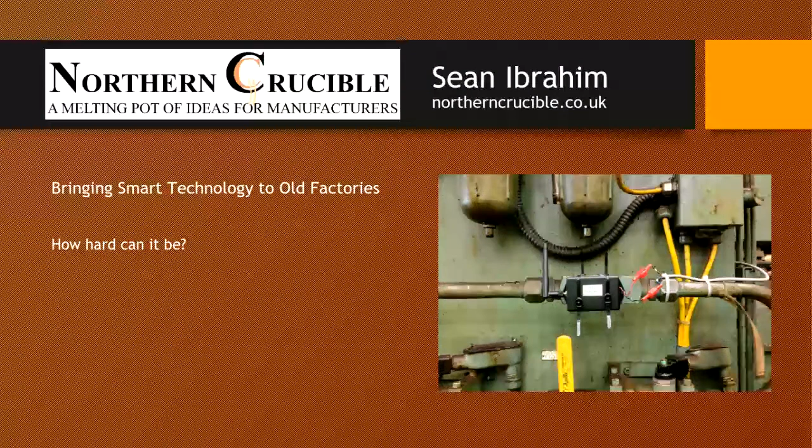I'm Sean Ibrahim from Northern Crucible. I'll do the introduction in a minute, but the topic for me is bringing smart technology to old factories. Most of the people I know are in legacy industry, and I'll talk about that in a minute.

Northern Crucible is based in Sheffield. We look after the local region. It's a voluntary forum for manufacturers in our region, with a membership of about 200 manufacturing companies, mostly small to medium enterprises. It's all voluntary, there's no charges for anything, all the information we give is free, and all our speakers do what they do for free. So it's a great place for sharing information.

I'll give you a little background about myself. I've spent 30 years in the industry - manufacturing industry, in MRO supply and smart tooling. I've been involved in lean and more recently apprenticeships, and I've got a background in pneumatics as well.

I put this in because it's quite interesting - 25 years of voluntary work in sport at high levels. Why would I put that in? Well, probably the biggest thing I've seen in my 25 years is the giant leaps forward British sport has made. I've watched elite athletes pick up gold medals, and when I was a youngster we were lucky if we picked up 4. It occurred to me - why doesn't our industry adopt the same attitude? This is why I'm talking to you and why I get excited about it.

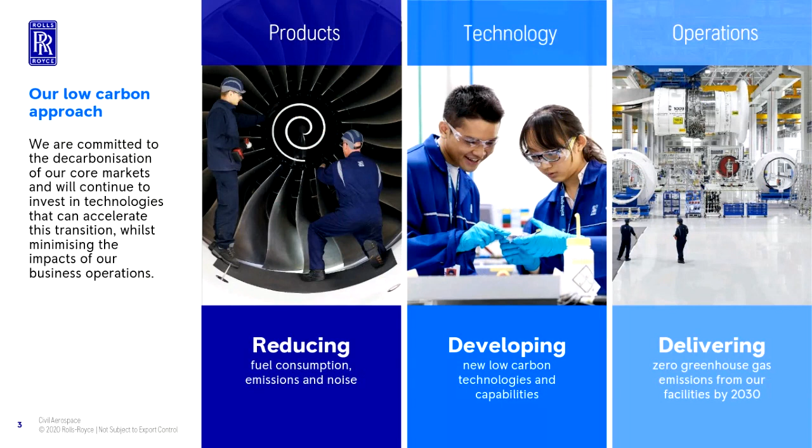Next slide please. Thank you. So our low carbon approach is through developing products that are indeed smart. The topic of today's conversation is IoT, and we use a lot of sensors throughout our engines and assets to be able to detect anything above 7,000 parameters.

That enables us - Sean was touching upon it earlier - to measure the most minute of things to the most detailed of levels. For example, we can sample data all the way to a 1 Hertz data rate, meaning every second we can capture data for all the parameters we monitor, and we're able to trend alerts and highlight any issues back to the airlines and ground operators.

that use our assets. Our approach towards technology is focused on ensuring we continue to champion our low carbon focus, so we're always looking at how to make our assets lighter, how to make the noise lower, how to make everything operate cleaner. For operations where we manufacture our assets and conduct our business, we're continuously investing in lowering our greenhouse gas emissions, and our intent is to go zero by 2030.

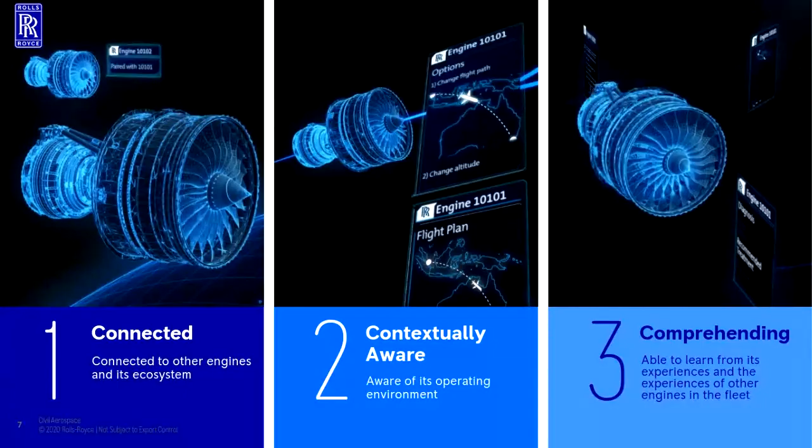One way we do that is through the provision of equipment health management. Equipment health management is all about avoiding surprises, keeping the fleet flying reliably so that our passengers are happy.

For almost 3 decades, we've been using the power of data to give our customers greater control of their assets and insight into their operations. We have close to 30 years of experience in data integration and analytics. In the aerospace sector today, 1,300 customers relying on our data service monitor 13,000 engines, covering 6,000 to 8,000 commercial flights per day, and we analyze billions of data points on board per flight.

On the Trent service alone, we monitor 14 million miles flown every day, from approximately 4,500 engines. That's over 5 million parameters per day, with an average process time of 3 minutes—that's what we aim for. That's roughly 384 observations that we manage per day, with a 3.9 minute average operations-on-arrival rate.

To put that in context: the engines are flying and transmitting data through the aircraft, depending on what the airline spends and can afford. Either it goes live into a satellite link and comes into our operations, or as the airplane lands, the data is transmitted to their ground station and comes back to us. We put a lot of automation in place to continuously analyze all this information and play it back to our operators.

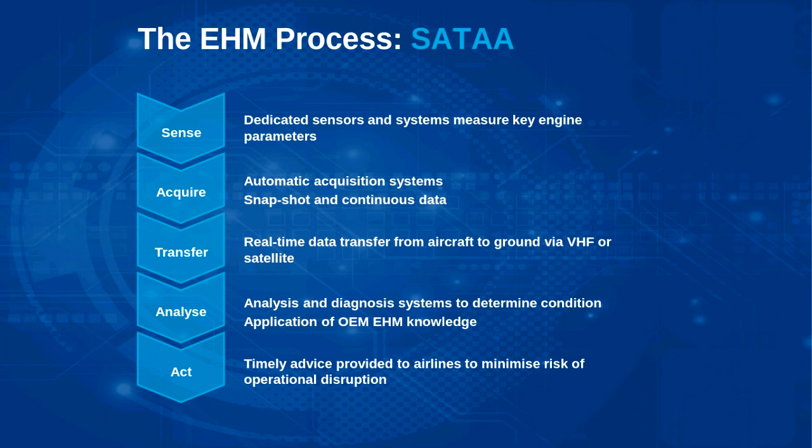So I touched upon earlier that the engines capture the data, but there's also the wider aspect: the aircraft capture data as well. Depending on what the airline is prepared to spend, these data points get either transferred live as they're flying towards a satellite, and then we get them, or when they land we put them onto the ground station and that gets transmitted. This is for all the airlines in the world who fly a Rolls-Royce engine.

Once that data comes into our systems, we apply data analysis and trend monitoring on top of it. Where there's a high red alert type issue that needs immediate attention, the airline, the ground crew, the pilot, our field service representatives are all made aware automatically through our systems. Actions are taken to ensure minimal aircraft on ground time so that your flights can take place as soon as possible, as safely as possible.

Through this data we also use it to help us understand when we need to remove our engines for maintenance. For airlines, time is extremely precious, and for you, your safety is extremely precious, both for the airlines and for us, everyone in the aviation industry. Being able to plan intervals for when we need to take these assets off and bring them to our maintenance repair overhaul shop bays across the world, we need to be able to use data to do that.

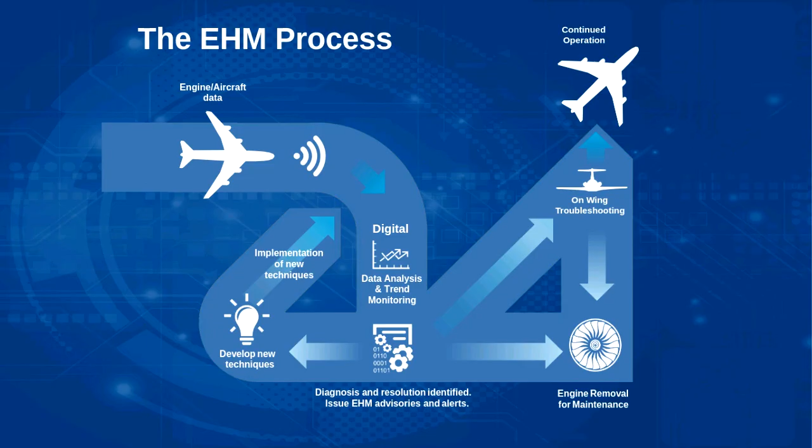This is where our intelligent care comes into play, where we have services and capabilities in place that enable the airlines to understand when they need to plan overhauls. They help us understand how much work we need to do on the engines. They help the supply chain coming into us understand how many parts we need, where we need them, and when we need them.

This is all enabled through IoT, being able to capture all of this information at all of these places in the maintenance, repair and overhaul shops, on the aircraft, in the engine, on the operations, making sure we use smart capabilities such as the emergence of augmented reality, as an example. Making sure the field service representatives, when they're doing their work, are given the right information at the right time, in the right way, so they can carry out all the activities they need to ensure the flight takes place as soon as possible.

This is where it becomes very important for us to always create virtual representations of the physical assets that are out there. We call this the digital twin. Through creating these digital twins, these models, these virtual mimicries of the real life asset that we have, we compare the actual performance of the assets.

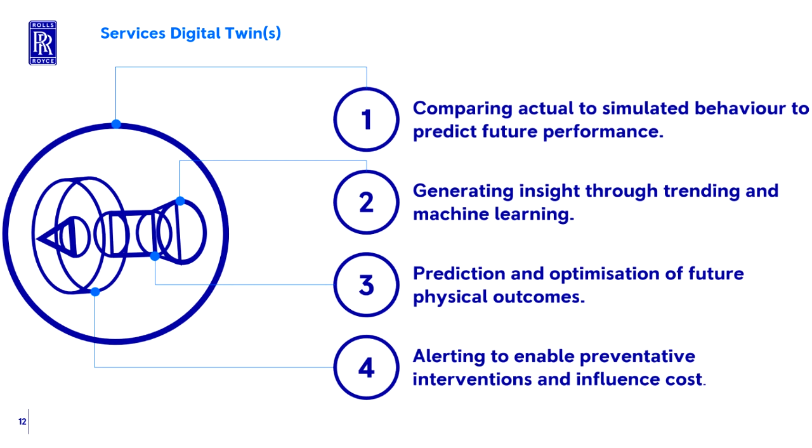The future for us is where we're looking to develop cyber physical services with a digital mindset first, a digital approach first, always thinking about how we can make our products and services for everyone, for our customers, for yourself, smarter. This is always enabled through capabilities such as AI, machine learning, IoT, and cybersecurity, so that we don't get hacked all over the place. And indeed, the people who make this possible are the young talents such as those on this call today.

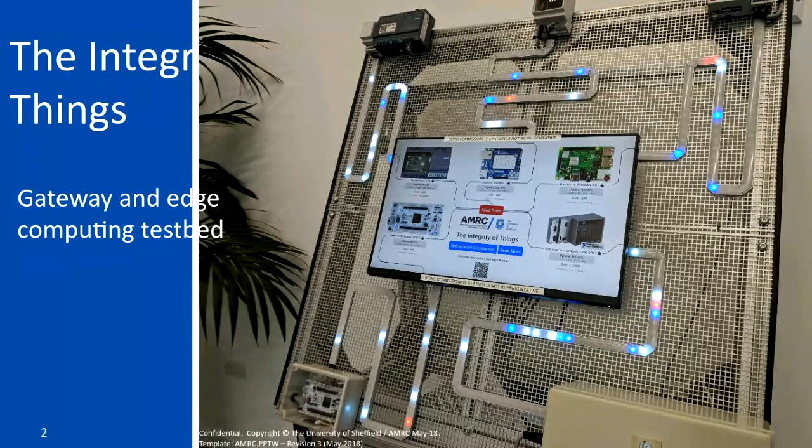Now most of what I'm going to talk about from here involves a lot of projects that use things like these devices in examples, but hopefully it will give you a fairly broad range of what can be classed as IoT.

Whereas previously, in a normal situation, they would have to look at drawings and then measure up where they need to put things in. This system does that for them automatically, and there's not an awful lot of smart stuff in there until you get to thinking about some advantages here.

So the first thing is that it's a smart projector. So if we need to move it from one side of the room to the other, it will recognize that it's moved and recalibrate itself to put the instructions back on the wall in the right place.

The next piece is that it can be a connected system as well. So let's say you're driving to work and you've got that in the back of the van, and you've got one set of instructions or drawings on the way there, and during the journey, the architect or building services engineer makes some amendments to that drawing for whatever reason - I know they shouldn't, but let's say they have. As long as that can be connected to the internet at some point during that journey, or when you're getting it set up, you can automatically get the latest version of those drawings put there straight away, and that basically turns that whole system into an IoT device. Just a bit of a different application.

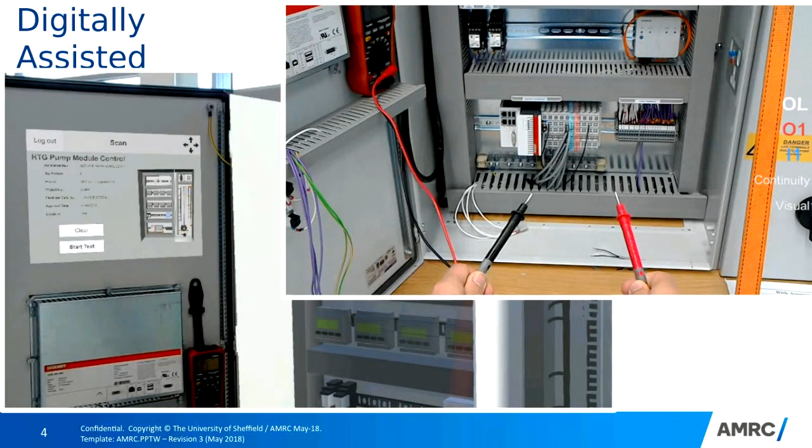And I talk about that one for a couple of reasons. One of them is that it looks massively expensive, it looks very fancy, but after you take away the cost of the shelves themselves, that system's only about $3,000 in hardware. So it's not ridiculously expensive, it just looks like it is.

But this system is then connected up to the MES system that you might be running, so the manufacturing execution system. And there's an awful lot of other IoT devices that are connected here as well.

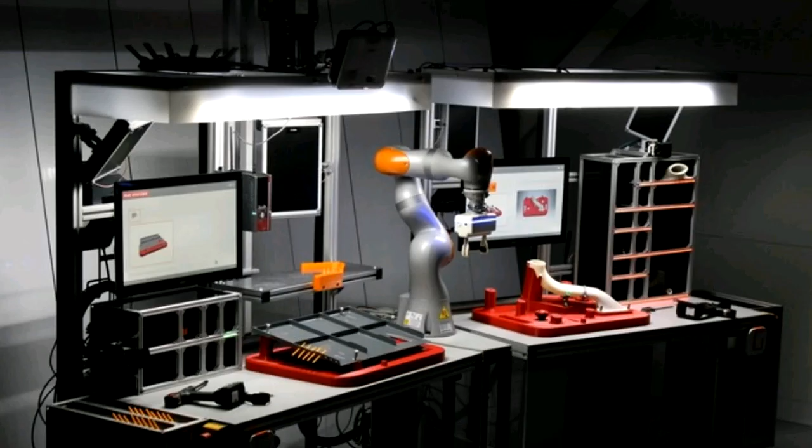This is just showing how you can connect up an awful lot of devices in an IoT sort of situation. The advancement of that, or where you'd see the development or use case, is in something like this, which is a smart workbench we worked on with one of our aerospace and defence customers.

Here you can see those kitting shelves again, so the pick by light systems in a smaller version are there, but you've also got projectors projecting down, giving instructions to the operator on the next part of an assembly, which are connected up to the MES system.

You have camera systems that are verifying that things have been done and that the next process has occurred. And yet again, in aerospace or a sector like that, that's really important to have that verification.

We've got smart tools on the bench there as well, which goes back a little bit to what Sean spoke about earlier on the likes of a nut tightening operation. Can you confirm via the data that you've got the right torque on a certain nut or bolt? Those smart tools allow us to do that because they're connected.

They can transfer that information back up to the MES or to a central database where we can confirm if we've done the operation correctly or not. We can automatically set the torque on the devices as well. But that's where you start seeing that bigger connection of an awful lot of bits and pieces.

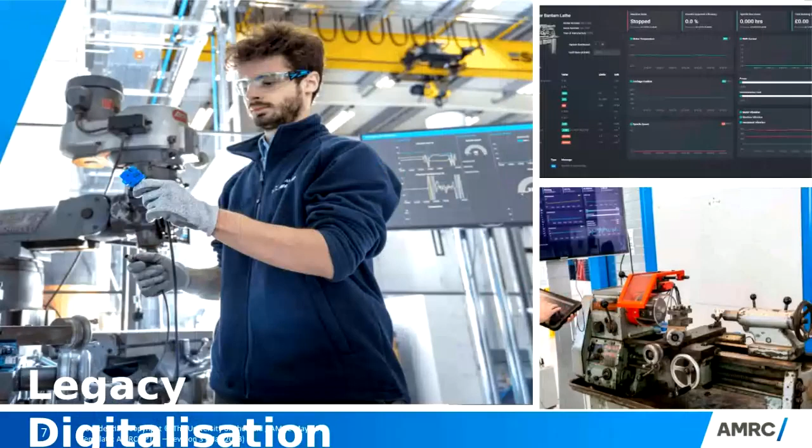Now, the last one I want to talk about, and I appreciate I'm talking very quickly, is a bit on legacy digitalisation, and this hopefully will resonate back to what Sean spoke about earlier. I think we've seen the same thing in the same conversations as what Sean has spoken about - people not sure how to get into the Industry 4 world.

Realistically looking at it, they're not going to buy a whole lot of new machines. They've got machines that work perfectly well, but just don't produce data. How do they bring those into the Industry 4 world? I think this will also link into some of the Ioetec conversation that's going to happen afterwards.

But about 2 years ago, a little over 2 years ago actually, we started this project, which was just looking at whether we can advise people around Industry 4 at a smaller cost point, an entry level into Industry 4 that resonates with SMEs. So we got a 1980s Bridgeport milling machine that you see there on the left.

We got a 1960s Colchester Bantam lathe that you can see in the bottom right, and we chucked some sensors on it. So we've got current sensors, accelerometers, proximity sensors, and a few other bits and pieces as well. But on the lathe, we spent about £400 on the hardware that connects to it.

So hobbyist kit, Raspberry Pi and Arduino. And on the milling machine, we spent about £4,000 on some National Instruments kit and read the samples in at about 5,000 samples a second, as opposed to the lathe that's about 50 samples a second. We ended up with two dashboards that were very similar from both devices, which you can see in the top right.

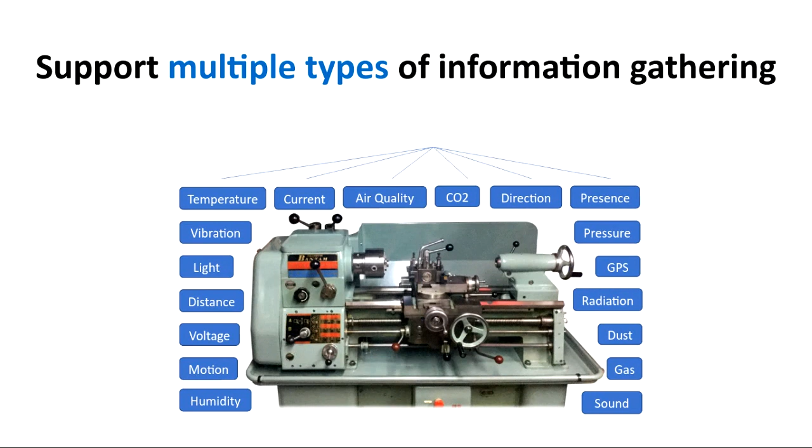So looking at each of these parts, the sensors can collect a wide variety of data, simple things like current, voltage, temperature, and movement, but also more complex data like proximity, vibration, and rotational speed. And there's obviously environmental information as well, like air quality and gas detection. It really just depends on your requirements and what it is you need to know to enable you to make your business decisions. And I think one of the things, picking up again on what Gavin said, is that there is a tendency to collect too much information. Selecting the information you need and what it is that you need it for is obviously quite an important part of IoT implementation.

So once we've got the data collected, it's normally passed on to a local hub, often referred to as the edge node device. These are small computer devices which collate and interpret the data before passing it on to the cloud. And again, there are a lot of alternative connection technologies, simple things like Wi-Fi and Bluetooth, as well as more complex industrial connectivity. But the edge node will normally handle these automatically. But this is an area to watch out for, particularly when you're building your own IoT network. The sensors are not always compatible, and it can be quite difficult to get them to exchange information.

For example, a British Gas Home Hive central heating control will not necessarily connect and communicate with a Honeywell radiator control valve, so zonal heating control can be a real challenge.

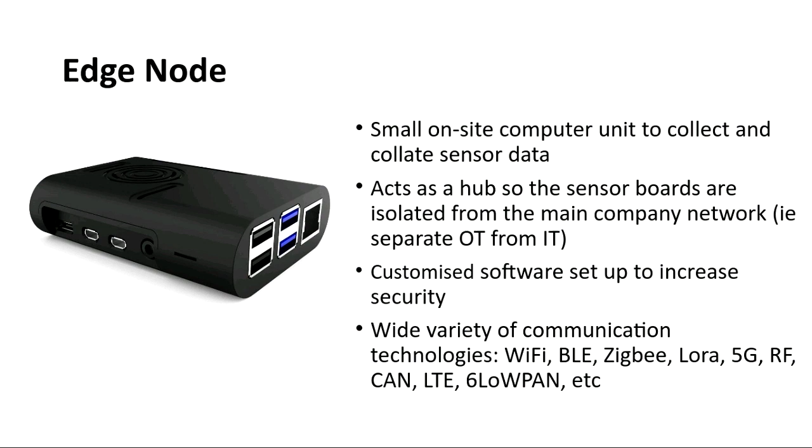Many IoT systems have some form of cloud capabilities, and there's always a lot of hype about the cloud, but really there's nothing that complicated about it. It's just a lot of computers sitting in a warehouse. What's important is that it provides you with effectively unlimited computing power to process the data, and it distributes data

to the users who need access, whether they are based locally or remotely. The available computing power can then be used to extract meaning from the data we have collected. Blockchain could be used for audit and traceability. Machine learning can interpret the data. Big data can be used over a period of time to look at trends. Augmented reality is particularly useful for addressing safety issues, and digital twins can be used to operate or monitor equipment at a remote location.

And finally, we have the user display panels to display the data. This may be a standalone dashboard, or it might be an integration into your existing systems. So now you can see how these component parts all link together, from the sensors connecting to the data processing and the communication to the user's screen.

So back to our AMRC proof of concept. Our aim was to complement the existing demonstrators and specifically show how IoT can be implemented securely. So why is security important? Well, it's a key part of what we wanted to show. And if the purpose of IoT is to collect data and then analyze that data to make business decisions, then the data has to be trusted if it's going to be useful.

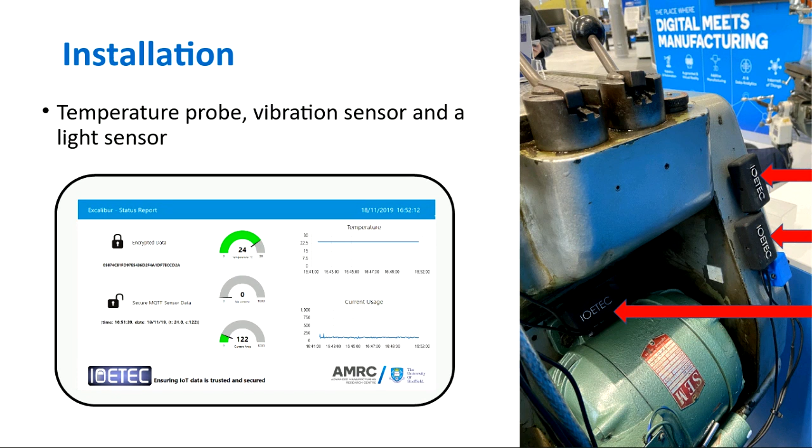So we installed 3 sensors on the equipment to measure motor temperature, light, and vibration. These were connected via Wi-Fi to a local hub, which then processed the information and sent it to a dashboard. In this instance, we used Node Red, which is an open source dashboard system developed by IBM. The dashboard shows current settings and recent history, and shows an alert if the readings are out of the expected range. To ensure security, each sensor was secured so that it was fully authenticated and the data was encrypted end to end. That's from the point of collection to the point of delivery.

When we designed the Ioetec system, we addressed some specific challenges. First, we needed to keep the cost down if this sort of equipment was going to be used as a practical solution with small companies. And that meant developing software geared specifically to resource-constrained devices.

Secondly, traditional security solutions do not work well in this environment. Solutions such as TLS and blockchain are fine for computers and mobile phones, but they don't work well on small sensors. And thirdly, networking can be tricky in some environments, and there has to be a separation of operational technology from traditional information technology networks.

One of the issues we addressed in the proof of concept was that the IT department were not that keen on us connecting edge processing hubs into their networks. Not surprising, as we were also asking for extra permissions for data access. It was important that we designed the system to meet their requirements, or we could not have used the equipment.

We also need to have a look at the up-and-coming legislation for IoT. Obviously, some existing legislation is relevant, such as NIS, ISO 27001 and ISO 9001. But governments around the world are now looking at specific legislation for IoT, such as the recent laws in California and the planned Secure by Design legislation by the UK government. These will affect how systems can be implemented, particularly with regard to updates, patching, and general cybersecurity.

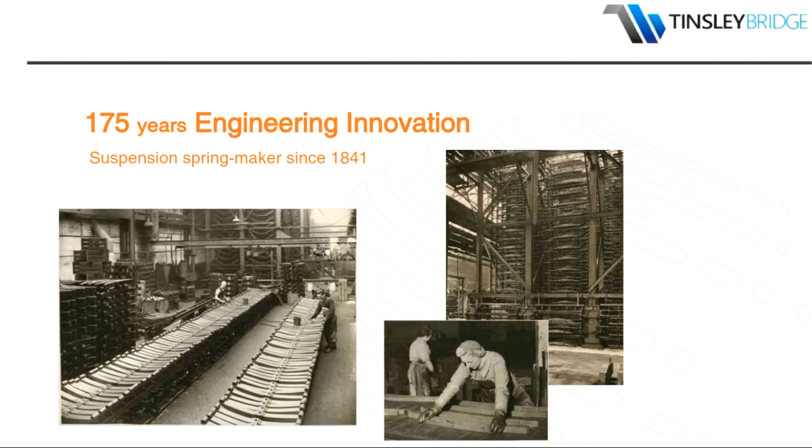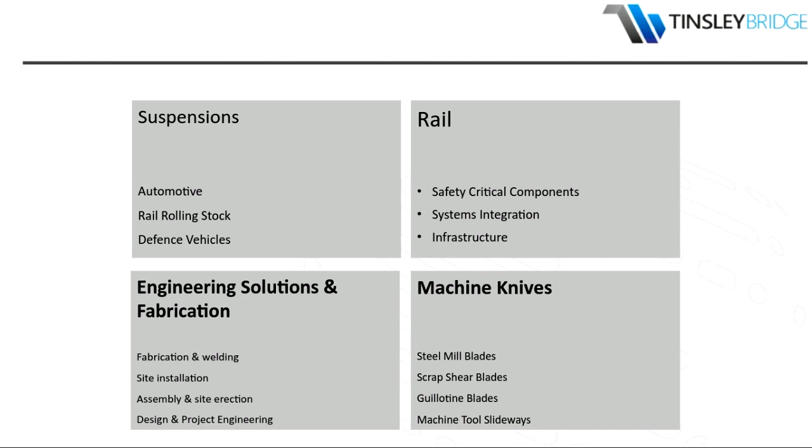So we make automotive components for our suspension company. We've got defence vehicle suspensions. We make the stretcher bar that I've just talked about. We've made parts for Wimbledon roof, the Court 1 roof. We've done nuclear projects. We've got a machining knives company - that's a lot of CNC machines, and we make machine knives for cutting up scrap metal and slideway tools. That's used in the airlines industry. We've got quite a broad range of products we make at Tinsley Bridge.

So why now for IoT? Well, for me, I think it's the economics of it. The sensors have come down in price. You can get sensors now that, I don't know, 5 or 10 years ago would probably cost 10,000, and now they cost £1 - talking about accelerometers and those type of technologies. We've got the edge devices that Gavin was talking about earlier in the talk, and they've come down in price too.

They've come along a lot. They're a lot easier to use, and the actual connection between the two is a lot easier now, and they're a lot more documented, and there's a lot more education out there. I'm a particular fan of the wireless technologies that are starting to come out, such as

LoRaWAN, which takes away the need to power a device. You can just run it off battery, and it can last up to 10 years. So there's no fixed networking required.

And open source software has pretty much made it the entry point to IoT free, if you know how to use the IoT software. And this is one of the routes that we've gone down. We've gone through the open source software route.

There are commercial softwares such as MindSphere, which is an online software, which is a platform, so a lot of people can develop solutions for that. So you send all your data up there, and then you can analyze it and display it. It takes away a lot of the hassle of setting up your own solutions on premise.

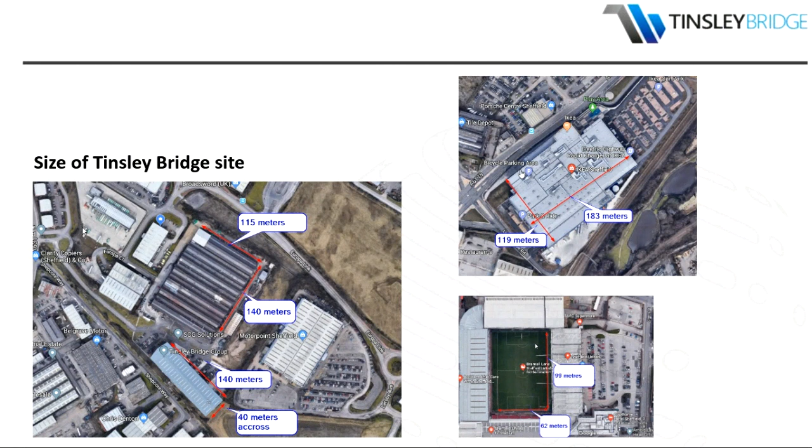I've worked in a lot of different industries. I've worked for software companies, I've worked for an internet service provider, and I've never seen so many audit checks that companies have. We've got the quality audits for ISO 9001, health and safety audits to make sure that our products are qualified, and that we have to look after our staff to make sure that our health and safety is in place. We've got lots of environmental audits that go on.

And cyber, for me in particular, it's cyber essentials. We've got to make sure that all our devices are secure, and with IoT, as Mike's been talking, this is going to be ever more important.

So with all those audits that we've got, a lot of manual processes happen where people go out and physically check something, and we decide how frequent we do that by the economics of it, because you've got to send a human there, and obviously that takes a cost. If we can hook up a sensor, an inexpensive sensor, we can get that frequency of checks more often. If you get more often, you can spot the problems before they happen.

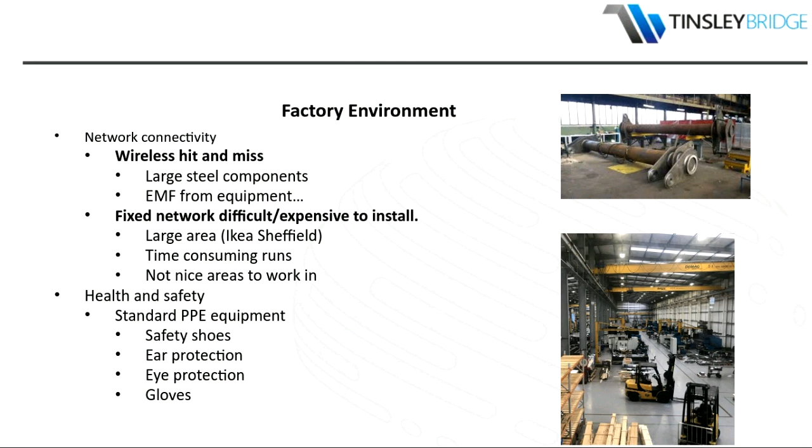And the products have to go through a number of different sequences. And each one of those sequences has to be very tightly controlled, which is perfect for IoT. This particular IoT project is being funded through Pitch-In, so thanks for that Pitch-In. And it's actually in collaboration with the Sheffield University ACSE department, with Boyang as the main contact.

And so what we're looking to do here is observe the equipment. So there's things like the filters that need changing very often, so we need to understand why they need to change so often. And at the moment, we don't fully understand the reasons for that.

We've also got motors. We have to keep the paint running continuously. If the motors die, then that causes us problems. So we need an alert to be sent out to the maintenance team when that happens. And this has come to light with the corona issue, because our engineers aren't on site as much. So what we need to do is be aware of the problem as soon as possible, so the paint engineers can come on site and make sure the motor is switched back on.